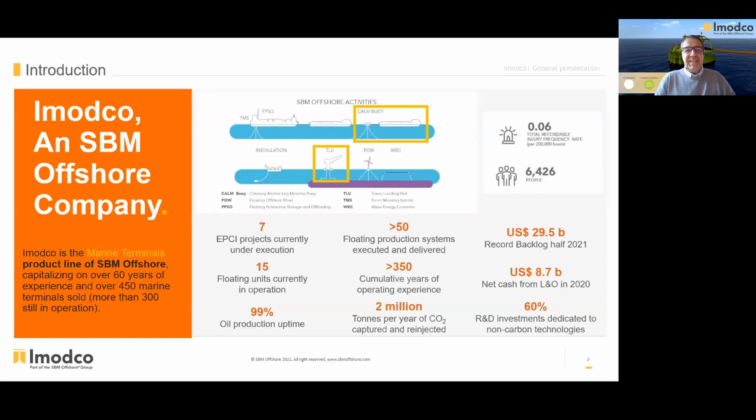But we belong to this company. We have the same DNA and culture of safety, and that's what we bring to this emerging ammonia energy industry. So my pitch is to say there is experience to make use of from what has been done in the oil and gas industry, which will be directly applicable to the transport of ammonia.

Sixty years ago, we used jetties when new harbors were not available or needed to be built. Jetties were thought to be more cost-effective, but actually not that much. They were still expensive and had poor uptime, the two key dimensions to consider: availability of the export or import system and the life cycle cost, which is capex and opex. Then a more cost-effective approach was a fixed heading, jetty-less solution—anchoring the vessel to four buoys with a fixed heading. That was much more cost-efficient, but still had poor uptime.

Then eventually Shell created this patent of the weather vaning buoy, also called a catenary anchor leg mooring. It's a system that gives two functions: first, the berthing of the vessel, allowing 360 degree rotation in a natural, passive way, aligning with the weather—Mother Nature adjusting the heading of the vessel—while we do the transfer, the second function, the fluid transfer, done within the buoy.

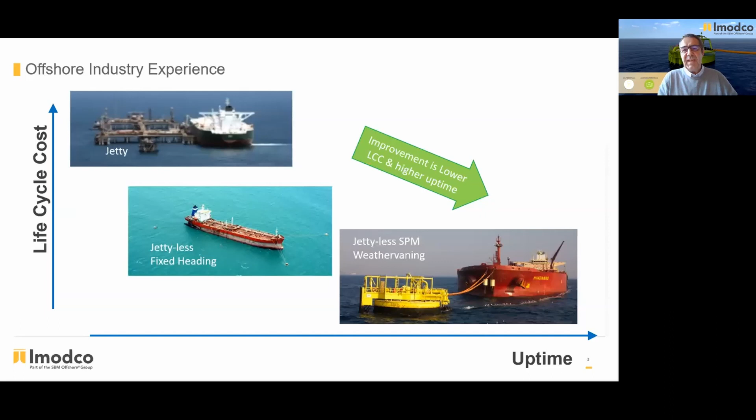So basically, this history of years of experience improved the way to transfer liquid offshore. That liquid was oil, but it can be ammonia today, and basically it will work for any hydrogen carrier—ammonia is probably the main one. The point is not to reinvent the wheel. There has already been quite good development of efficiency in the industry, which will be useful for ammonia.

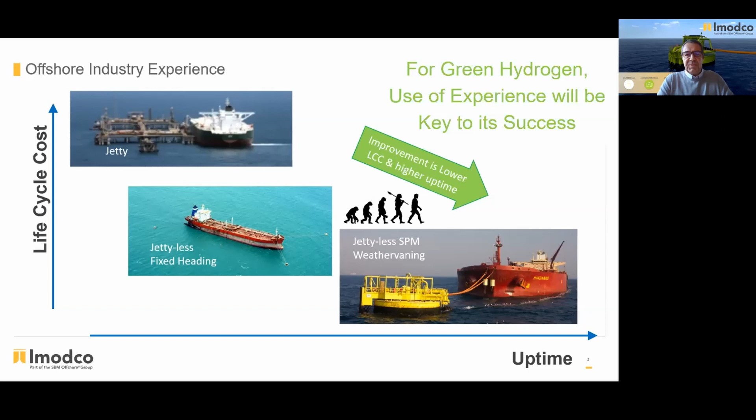The next slide shows a bit more what a jetty-less system is. If you look at the left picture, you have the storage—here it's for the oil business, but it's the same for ammonia—your storage on shore. You have a short pipeline to go offshore far enough to have enough water depth, and then the SPM, the single point mooring, the terminal to receive the vessel in open sea, with this weather vaning capability to adjust to changing weather.

As you can see, there are many of those terminals built over 60 years of experience across the world, and we, IMODCO, have delivered most of those systems. There's a small video I don't have time to show today, but I'll give my email address at the end, and if you want, I can give you the link so you can see how it works—it illustrates very well what we're talking about.

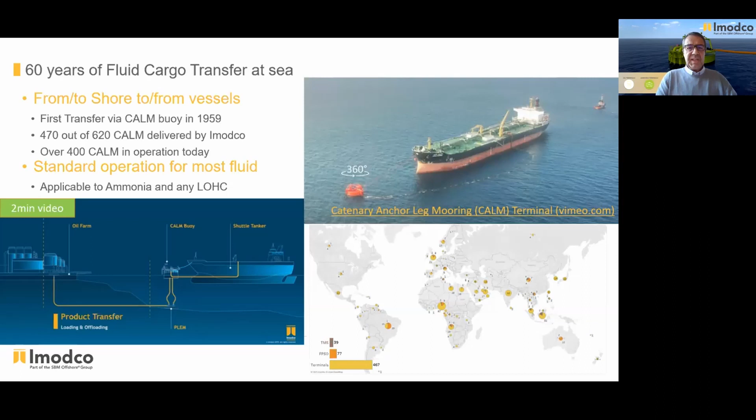The next slide is mainly about the technical segmentation, and I'll save it for questions if we have any.

This slide recaps the benefits of jetty-less systems for ammonia projects. Basically, the context is that ammonia will be created at industrial scale and needs to be shipped from the place where it's created to the place where it will be used. That is the key advantage of having a jetty-less terminal.

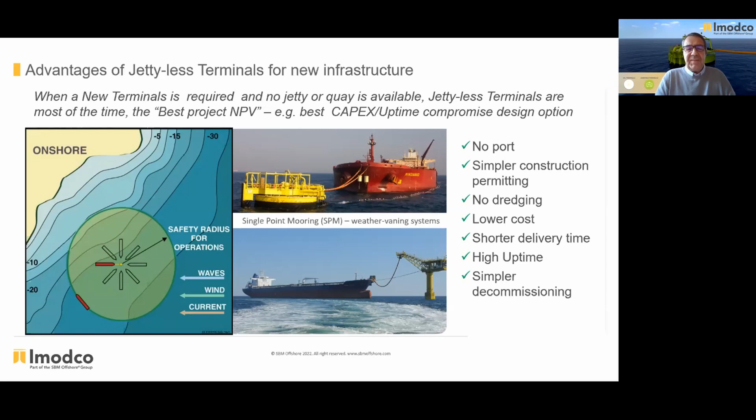I'll keep this for discussion if we have questions on CALM buoys and the other types of weather vaning systems, like the tower loading unit.

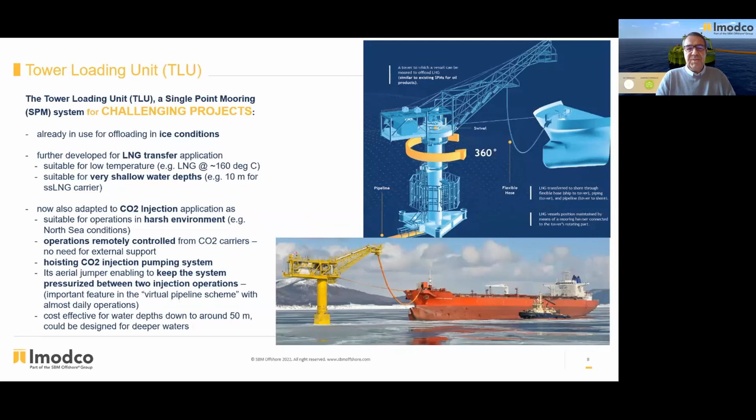To conclude, this experience of 60 years is available for ammonia transfer. What we need is to qualify it for the different application—the fluid, the contact with ammonia, which has a different chemistry and different temperature. We're talking about liquid ammonia at minus 33 degrees Celsius. That is the qualification program we have started, and we already have approval in principle from DNV and ABS, and we will complete this program next year.

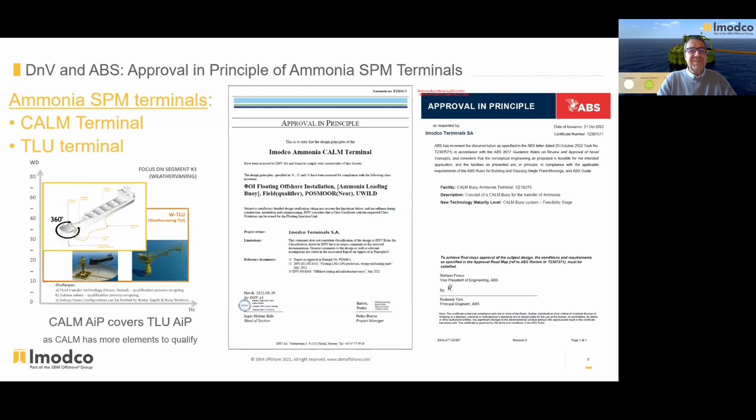That's it for me today, waiting for your comments and questions later on. Thank you. You can contact me at that email address.

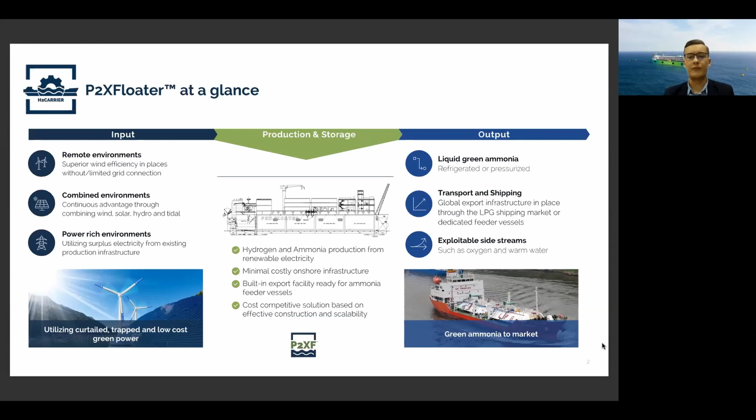So as I said, the technology is heavily inspired by floating production, storage, and offtake from the oil and gas industry. This was a technology that emerged 50, 60 years ago when they discovered oil assets and gas assets in sites where they were far away from infrastructure, hard to reach, and the volume might not be feasible enough to justify the construction of a full oil platform.

So in the beginning, they took existing very large crude oil carriers and they took them to a shipyard, did a life extension, reinforced it, and then put a chemical oil refinery on the top side of the vessel. That way you could take an existing asset, refurbish it, put a chemical production facility on top, and then move it out to the site where the oil is. And that way you could more rapidly and cheaper deploy and refine the oil that would otherwise be considered a stranded asset.

And this is the same thing we wish to do using green ammonia as the medium instead of oil and gas. So our design is initially based on taking a very large gas carrier, a VLGC that has ammonia compliance, and then taking it to shipyard, refurbishing it, doing a life extension and putting a chemical plant on top for ammonia production instead of oil and gas production. And we see that this technology is very mature and generally off-the-shelf technology. Next slide, please.

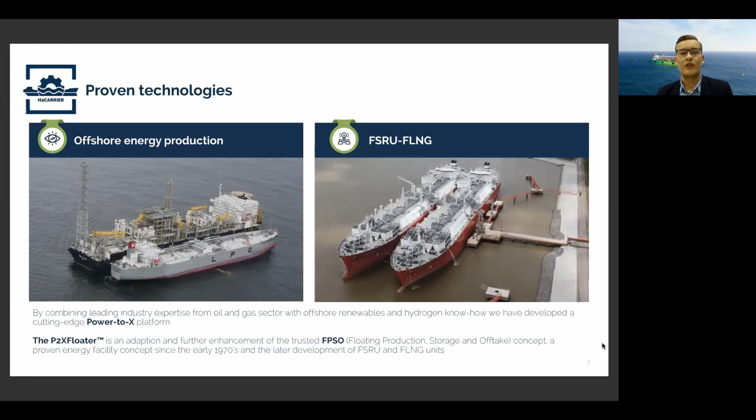So here's an overview of the components that are on board. Ammonia production is relatively simple compared to some oil and gas extractions. The chemical process of producing ammonia is always the same, but for an FPSO in the oil and gas industry, the concentrations of oil and gas are always different, so you need a more tailor-made design. Our design is a lot more general because if you can get electricity at the right volume and at the right frequency, you can scale the vessel up and down relatively easily.

So on board you have the power reception unit to distribute power to all the components. You have pumps that pump on board seawater that goes through desalination, demineralization, electrolyzers for producing hydrogen, nitrogen extraction, which extracts nitrogen from the air, which is combined through the Haber-Bosch process to produce ammonia, which is cooled down and stored in liquid state in the tanks of the vessel.

This is the chemical production aspect of ammonia. It has been around for a very long time. I've seen drawings of ammonia plants running on electrolysis all the way from 1925. So it's essentially a 100-year-old technology. And electrolysis has had large-scale production since the 1940s. Next slide, please.

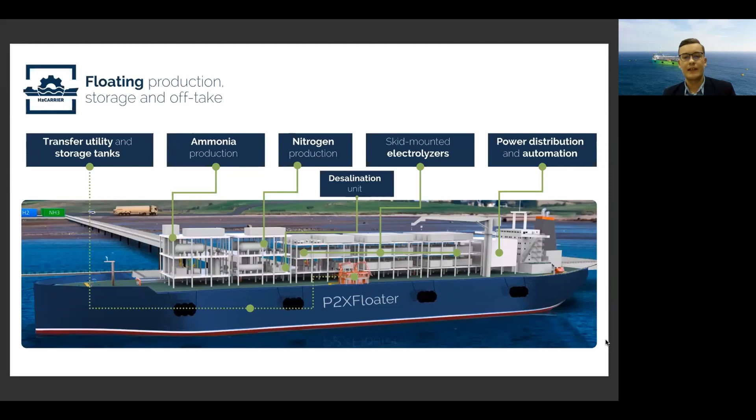You might want to ask, what's the purpose of building this on a ship instead of just building it on land like everybody else does? There are a couple of good reasons for this. We will have our construction at a shipyard or at a large workshop. This centralizes the construction with all the personnel, tools, and equipment in one central space that decreases the need for logistics and transport of both personnel and material.

There's significant public and regulatory advantages, such that you do not actually require any land, almost. So the concession for production is easier to achieve. It is a mobile asset, so even though we wish to remain on site for the lifespan of the vessel, if the underlying circumstances drastically change, you could potentially relocate it, so it will never be a stranded asset.

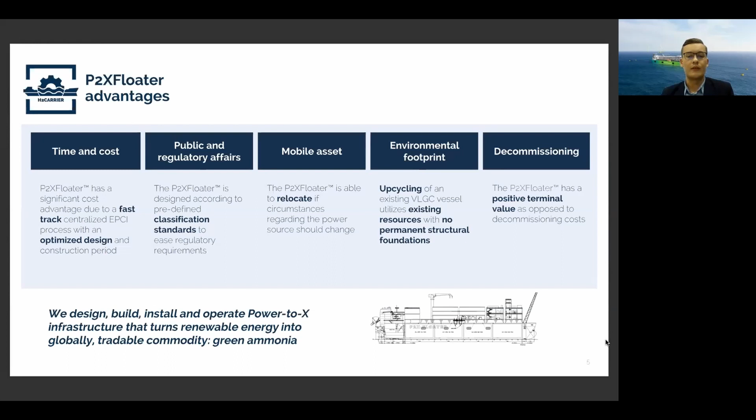It's also based on the converting of an existing vessel, which is an upcycling using a VLGC ship for something more environmentally friendly than it was originally designed for. And at the end of the lifespan, you can easily recycle it as it's mainly steel, and steel is relatively easy to recycle. Next slide, please.

So what we do here at H2 Carrier is practically the entire Power-to-X value chain. We identify renewable energy, work together with renewable energy developers, establish off-take agreements on the ammonia, then we do the engineering, procurement, construction and installation, with all the planning and the design of the vessel topside. And then we do the operation and maintenance and can contribute to the distribution of the ammonia.

And that way you have a full value chain that easily can enable the development of stranded renewable assets and bring them to the market through ammonia without expensive and time-consuming infrastructure such as extensive power lines and with minimal need for the use of land. I think that was the last slide.

Thank you. Okay, you're also on time. Amazing. Thank you. That's fascinating. And again, let's just keep the momentum here. Do you want to kick off there, Puneet? Sure, Andrea.

I worked for MODEC for about 20 years in the FPSO space. I worked on about 45 different FPSO projects in my life. The last 10 years was spent as a VP of project development. So I've got experience with FPSOs on almost every continent on the planet other than Antarctica. I left MODEC in 2019 and joined Pyramid E&C as a consultant.

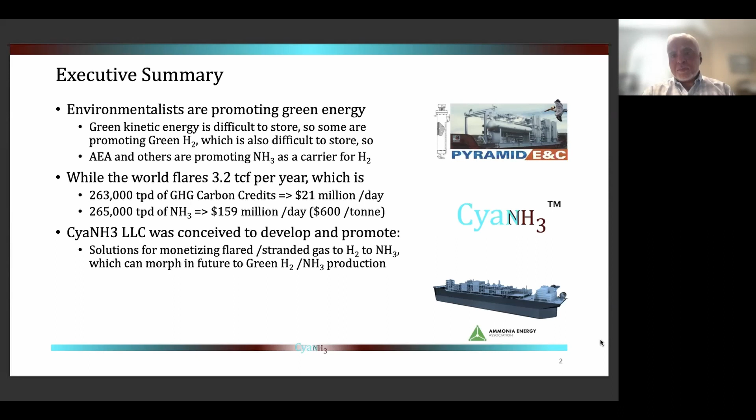So in early 2022, we created CyaNH3 to develop and promote the monetization of flared and stranded gas to ammonia, as well as that same solution being able to morph into a green hydrogen ammonia production solution in the future. Next slide, please.

The reason why we call it cyan instead of calling it blue ammonia or green ammonia, and created the concept of cyan ammonia, is when you look at green ammonia production and blue ammonia production, all the boxes that are colored in cyan are either the same or similar between the two processes.

In green hydrogen production, you're using green energy and an electrolyzer to make hydrogen. In blue, you're using natural gas and steam reforming to make hydrogen. The one other step that's different between the two processes is in blue ammonia, you have to separate the CO2 out, whereas in green ammonia, you don't.

So if you think about the overall asset, the hull is the same, the living quarters are the same, the mooring system is the same, minus maybe some modifications in electrical swivels for power incoming or hydrogen outgoing. Almost everything else is the same. As a process engineer, when I looked at the overall topsides, 80% of the topsides between a blue and a green hydrogen ammonia solution is identical.

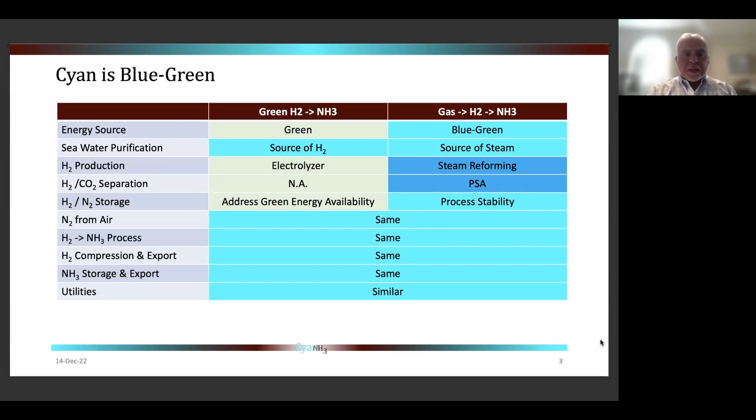One thing that I did when I was at MODEC is we looked at FLNG starting in 2015, and we looked at various hull forms. We looked at about 13 different hull forms for conversion into an FLNG unit. And our end conclusion was that the existing hull forms are not ideally suited for conversion into a storage unit that can store liquefied gas. So we developed our own FLNG hull using different storage mediums. That FLNG hull included storage for LPG, condensate, and LNG.

So using that knowledge, we looked at the idea of an ammonia FPSO and concluded that, similar to the FLNG problem, existing hull forms are not suitable for easy conversion into an ammonia FPSO. There is one hull form that we've concluded will work. I don't want to discuss that here, but there is one possible solution using a conversion.

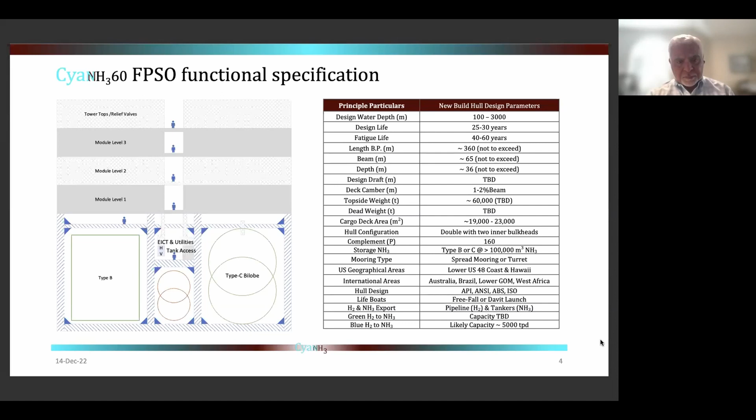In floating ammonia, you take the natural gas, produce the ammonia and/or hydrogen, send the hydrogen to shore via pipeline, send the ammonia to shore via tankers, and you take the produced CO2 from your FPSO and re-inject it back downhole. So you have 100% carbon sequestration potential with floating ammonia versus zero potential sequestration with FLNG.

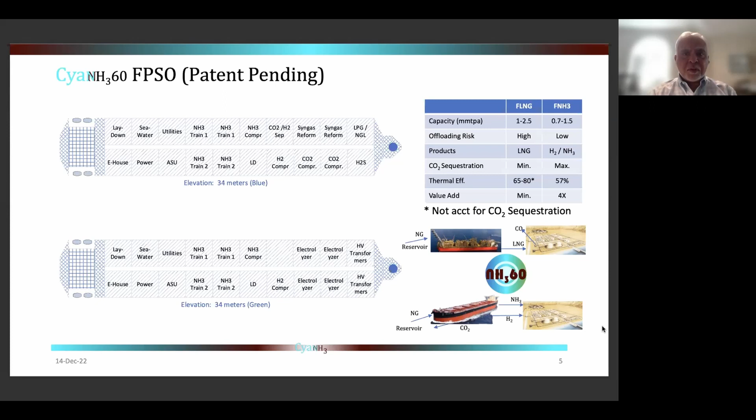Current status: we approached VC funds in 2022, and were told that they weren't interested unless we did a number of things. First thing is they wanted us to have a patent. So we worked throughout the summer of 2022 and filed a patent in September of 2022. They also told us we had to develop a feasibility study. We've proceeded with the feasibility study. We've iterated on the hull at least 3 different times now. We expect this hull iteration to take us about 9 to 10 months.

We've applied for grant funding to do a full-blown FEED on the solution. In the meantime, we're going to continue to iterate on the hull. And we've also got a partner company that's working on a 50 ton per day onshore pilot plant, to prove all the technologies that we intend to implement on the FPSO itself. That pilot plant should go online by March of 2023.

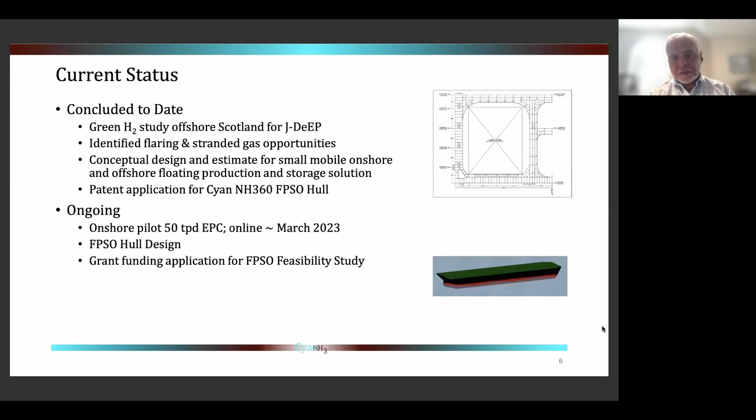Thank you. And we are still relatively well within our boundaries. I can see that Puneet and Sebastian could have a good argument if we wanted to see that, about a few points there. That's to be expected. We are in a nascent kind of situation with these concepts offshore, and I think that time will probably prove both of them slightly wrong in some ways. And the good thing is that we have all these different ideas popping off and things happening, and it's moving forward. The overall message here today is this is part of the future in whatever form it ends up being. So rather than try and encourage you two to have a fight...

I think I'd just like to ask you some kind of boundary questions, perhaps, just to establish a few facts. We have on this call, as we were talking about when we were waiting to come on, we have me in Sweden, Philippe in France, Sebastian in Norway, Puneet in the US, and Andrea backing us up in Mexico.

So Sebastian, what regions do you see your technology being employed? That's a good question. We see that the coming demand for power in all forms is significantly going to increase, especially in Europe, where up until recently it's been mainly powered by gas, natural gas. So we see that in order to meet the demands of the coming future, you need to get energy from all sources. A lot of the sources with the best conditions for renewable energy are generally in conditions that are hard to reach, such as islands or windy places far away from cities and infrastructure. The challenging part of those places is to get the energy—it's not to produce the energy, but to transport it.

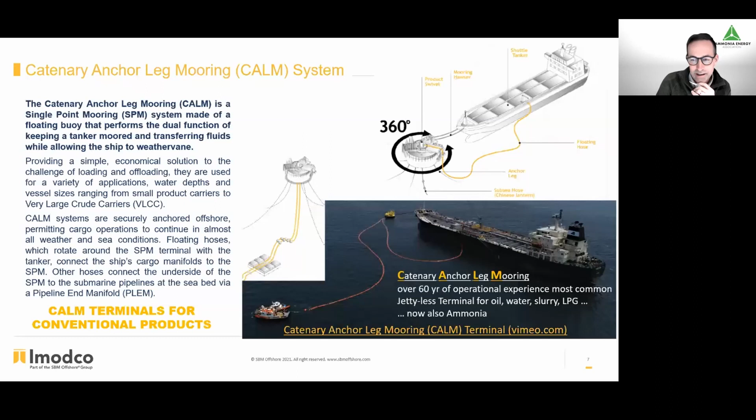Looking ahead at the work you have to get this approved, when do you think you'll have your ammonia system qualified? Next year—by end of next year we'll be done with the qualification of all the components. What we have achieved this year is approval in principle. We have ABS and DNV who have reviewed our work and all the elements we need to qualify, because there are elements to be qualified. We cannot just go offshore; we have to make sure it works as we think it will work. They have approved our qualification plan by giving us the approval in principle.

And now, to be fully qualified and to commit our company on the system that will work, we need to finish those testing that are planned and will be completed by end of next year. So there are testing that we do ourselves and testing that we follow with suppliers.

Okay, so that's great because it kind of lines up with a lot of other developments which are expected to fall in over the next few years, not least maritime engine development, for example. Yeah, the value we bring is that we will put our stamp on it, saying, okay, the overall system is good to use.

Look, just a quick side question here, very quickly. Have you thought about this not only for offloading in the offshore environment? It could also be used by ammonia tankers that are carrying ammonia as a cargo, from traditional coastal ammonia plants.

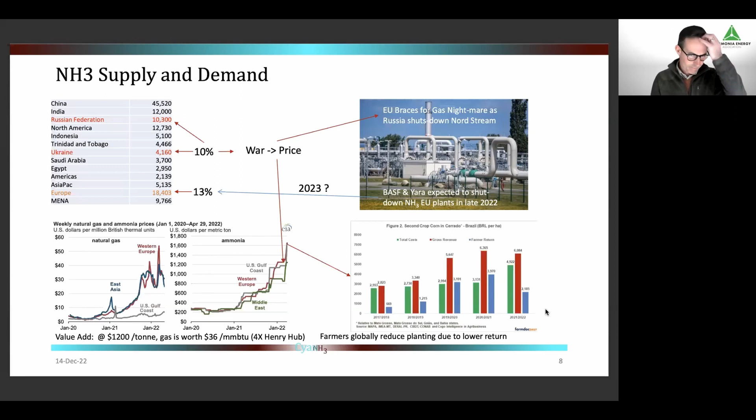It's fascinating. And you're looking at maybe next year for having your basic design finished, Puneet, is that right? We're proceeding with the design based on our own finances, but these types of designs require a lot of money, so we've applied for grant funding to try to progress the design, but the intent is to have it done by the end of next year.

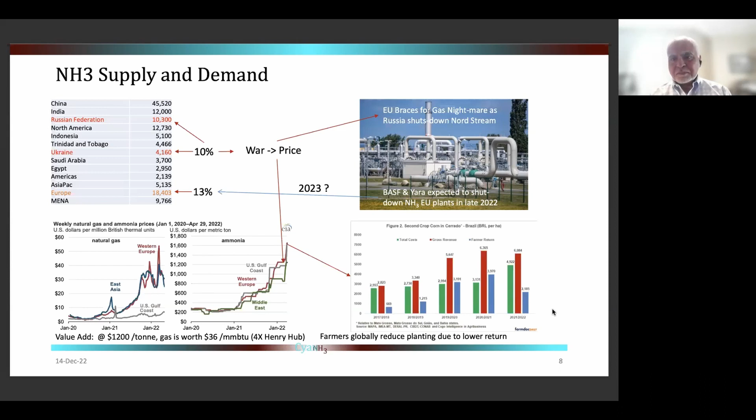Some practical questions. Jennifer's asking: for ammonia production on a platform the size of a ship, what tons per day are desired, and is that based on nameplate capacity or renewable resource availability? So this is quite a specific question. Does anybody want to take that? Production and kind of nameplate or resource wise?

I can take it. For an ammonia production platform, it depends on the site for the most part. We have two versions of our design: the nearshore version and the offshore version. For nearshore, you're less exposed to waves, so building at a larger scale is easier and usually more economically feasible because as you increase scale, the cost goes down. The offshore version is more challenging because you can't have a simplified hull design, you need a proper offshore hull design. But we've looked at, for example, an offshore environment with a 200 megawatt production unit producing about 440 tons per day of ammonia, though that's a relatively small production unit.